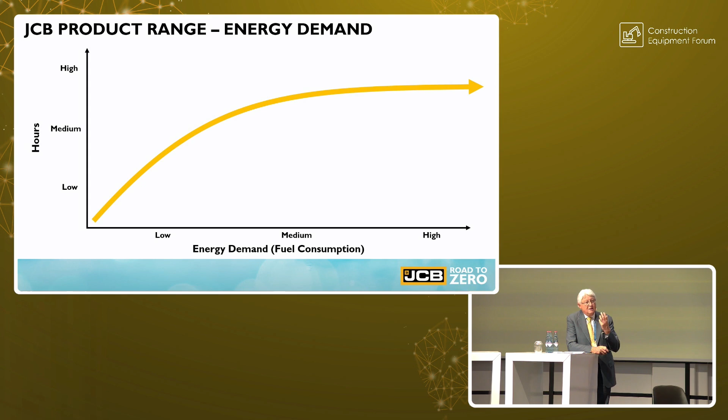And we like to make a parallel for our machines. If we take in a graph the hours that a machine is working and the energy demand of a specific model, we can make a comparison with road vehicles, say, for example, with cars, buses, trucks, or trains. And we can say that compact machines are very similar in terms of energy requirements to cars.

Why is that? Other types of machines, like medium-sized machines, have an energy requirement more similar to buses and trucks. This depends mainly on how many hours they work and what kind of application they are working in. And if you go into heavy construction machinery, their energy requirement is more similar to that of very high utilization, like trains and that kind of thing.

But to stay on the compact machines and the energy demand, we make a comparison saying that a mini excavator, normally speaking, is working 400 hours a year. And if you think of a car, normally speaking, a car is making, on average, 20,000 kilometers per year, with an average speed of 50 kilometers per hour. So, in reality, we are using most of our car for around 400 hours a year.

And so, we have established a perfect correlation between a mini excavator and a BMW. So, it's a great step. But this is giving you the perception of the fact that, how is it today, say, popular to have an electric car? At the same time, in terms of energy demand, the mini excavator is very similar.

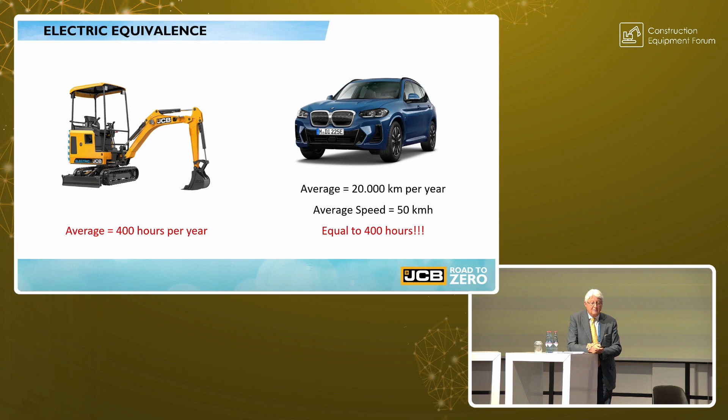So, we have developed a range of electric machines that is in the range of the compact space. Machines that are used for a number of hours, which is relatively low for a type of equipment. So machines that are used in an intermittent way for about 400 hours, maximum 500 hours a year. And we have quite a vast range of these machines.

But when you go back to our graph, we determine what we call a job site limit. So fundamentally, a limit for machines of a certain size, of a certain dimension, to be effectively used with an electric variant. Because there is also one question, which is the time taken to recharge this machine and the availability of enough, say, electric source or electricity source to make the recharging of the machine effective.

When we arrive at bigger machines, then this becomes more complicated because, first of all, the machines are probably working in a remote environment.

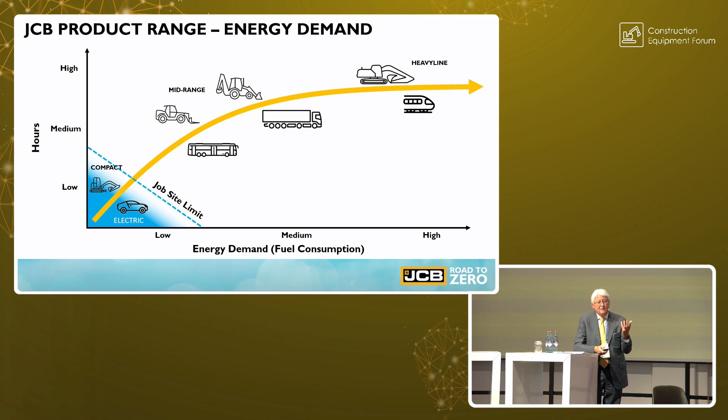The electricity, the power required to recharge this machine becomes too much, and is not available on site. We are convinced that to make decarbonization effective, we need a solution which is fast refueling. The recharging of the equipment has to be very similar to filling up a tank, and the energy source has to be mobile, because our machines don't go to the pump to get filled with diesel - it's the diesel that is taken to site to refill the machine. These are the two main objectives of our developments.

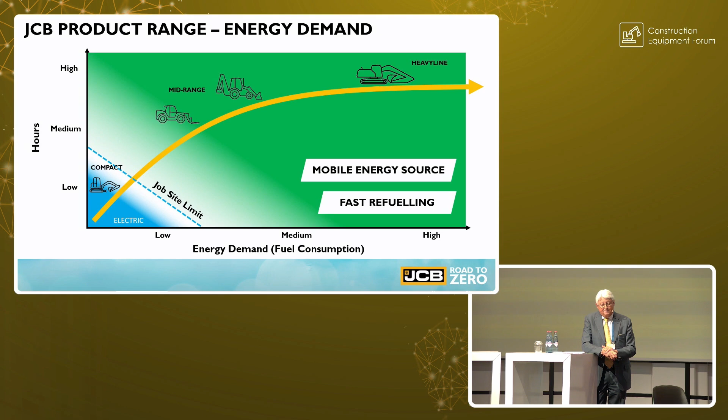There is also another consideration: in the 10 years between 2010 and 2020, we have increased the productivity and efficiency of our engines, obtaining an average fuel reduction of about 50%. So we have reduced the use of diesel by 50% in 10 years, and these are real data taken from our telematic system - this graph is real, it's not just a drawing.

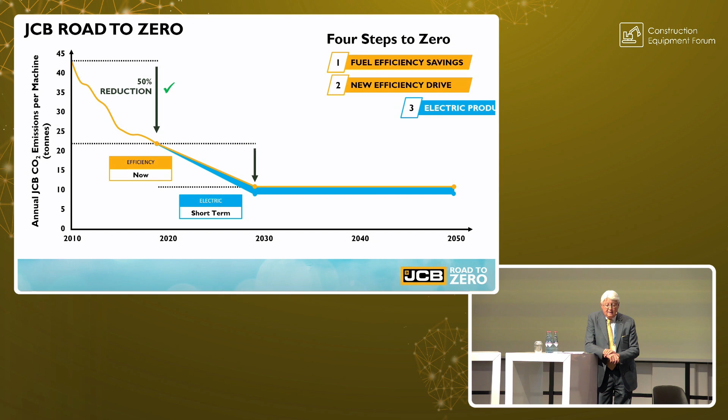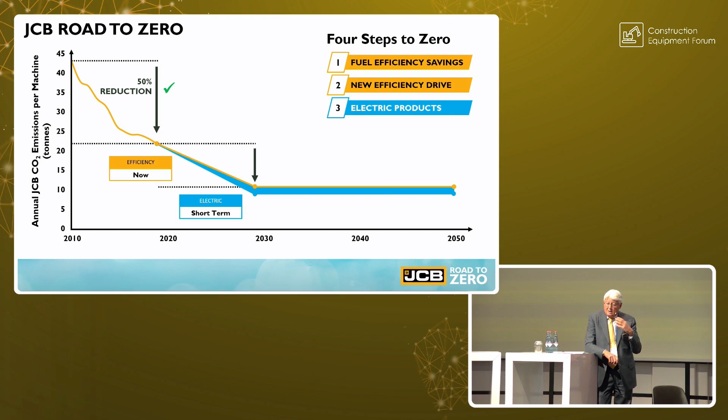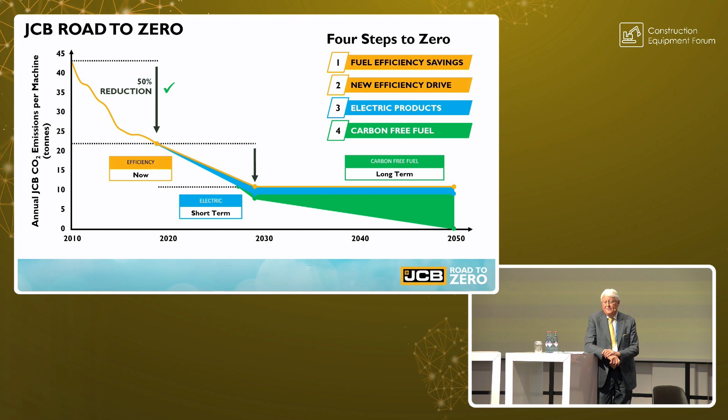To arrive at real decarbonization, yes, we can do more efficiency in the engine, and this is an area we are really active in. But we think that with electrification of machines, yes, we can electrify efficiently a number of machines, but the effect on decarbonization is relatively small because they are compact machines and the CO2 they emit is relatively small. The real step to arrive at net zero by 2050, which is the goal in Europe, we need something far more radical - the only way to achieve this is to find a carbon-free fuel, which is very limited in terms of what options are available.

I'd like now for you to see a video where our founder, our chairman, is telling you what we are really doing in this area.

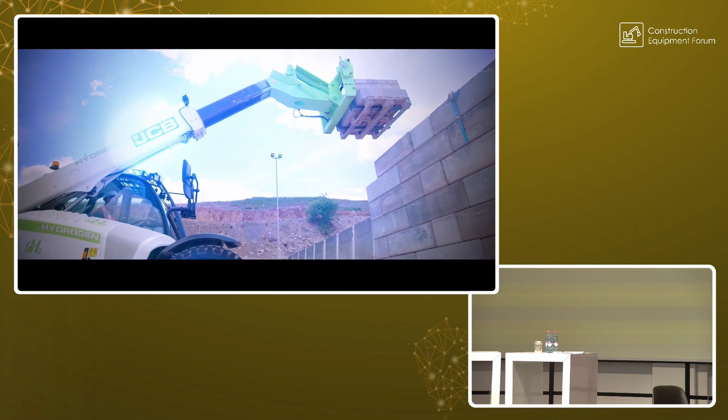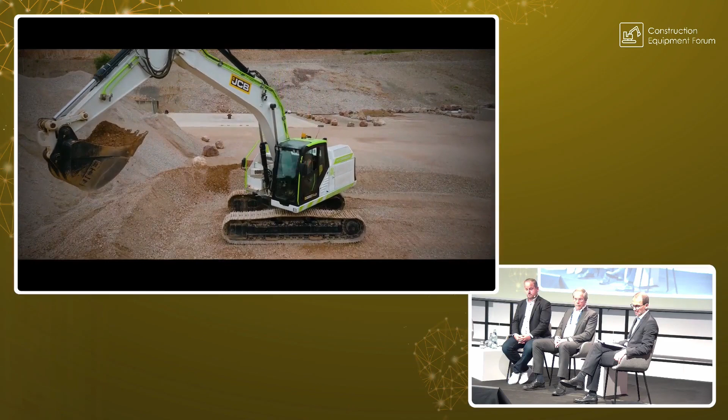I'm often asked, why hydrogen? Where does the power come from? It comes from that - that is a glass of water, H2O. You split the H2 from O, and it's possible to do it at scale around the world. This is power - the power to move the earth, the power to change the world. This is JCB's hydrogen combustion engine at work. Welcome to the future. Meeting the UK's ambitious goal of cutting net carbon emissions to zero by 2050 takes a lot of bold thinking, a lot of hard work, a lot of innovation - the kind of thing JCB has been delivering for over 75 years. Two years ago, almost to the day, I set the challenge that we should be making hydrogen engines for the construction industry and for agriculture. Two years later, we have hydrogen engines working in the kind of equipment that JCB makes - a solution that delivers power in the same way as conventional engines, but with none of the fossil fuels. So where did it all begin? In the early days of the hydrogen story, we believed the only technology available to us was a fuel cell, so we made a fuel cell prototype 20-ton excavator. We started to understand the complex challenge of putting a fuel cell into a piece of construction equipment. Construction equipment machines need energy quickly, whereas fuel cells were maybe better suited to a more gentle environment. We started to realize that maybe fuel cells weren't too good for response, were too complicated and too expensive for the market they serve. We knew we at JCB could do better. The two machines we have on site are game-changing. Firstly, we've got a backhoe loader. Secondly, we've got a Loadall. What we've done is taken our hydrogen combustion solution and incorporated it into both machines. We've worked out how to remove the fossil fuel tank, replace that with hydrogen tanks, and now we've got both machines running with the same characteristics of speed, of loading, of digging, performing in the worksite. So what's the secret? It's this.

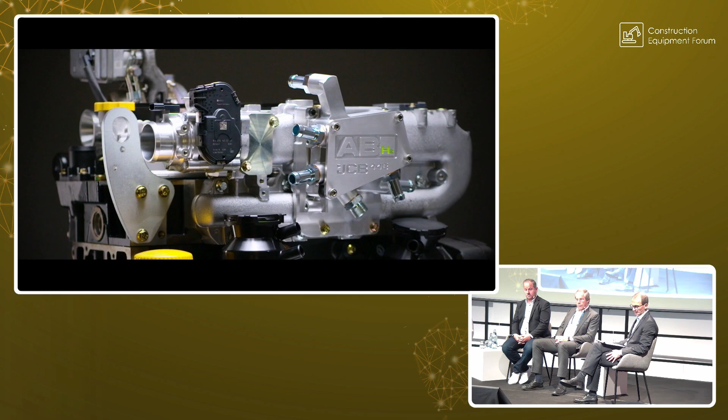This is not a conversion. This is brand new combustion technology. We've had to look at almost every facet of the engine, and we've completely re-engineered it to run on hydrogen. It's a zero carbon fuel, and it gives us a zero CO2 solution.

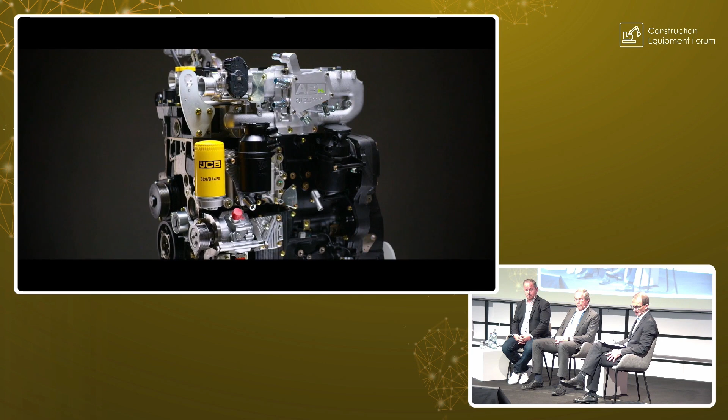We've kept the DNA of the engine. The components are familiar and common. The big difference is the fuel. We've gone to a zero CO2 hydrogen gas. We inject it into the engine. We've lowered the pressure, we've lowered the temperature, and that gives us a clean burn and a zero emission product.

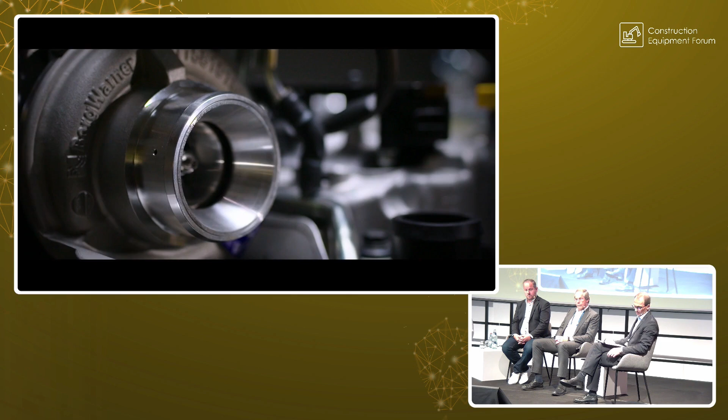We've worked really hard on the performance characteristics of this engine. We've done that to make sure that we deliver exactly the same power and exactly the same torque as the diesel power plant that we've replaced.

But it's on refueling that the hydrogen combustion engine really comes into its own. Most of our machines, 97% of them in fact, the fuel is delivered every day while the machine keeps working. So we've developed a fueling system, a hydrogen bowser, so we can take hydrogen from the tube trailer, decant it, and deliver that hydrogen fuel to the machines that are working on site.

JCB is the first in its industry with a hydrogen combustion engine solution. But what's needed now is a hydrogen fuel infrastructure, one capable of producing the quantities of hydrogen required to power the solution at scale and transporting it to where it's needed.

With investment, that infrastructure could then be adapted to produce the necessary quantities of hydrogen, preferably green hydrogen, enough to fuel our machinery and power other industries too. A practical solution to a global problem.

In a world where energy security is now a top priority, these are more than prototypes. These are fully fledged machines. Working right here, right now at JCB, we're proving daily that hydrogen does work, that it's a clean, renewable, transportable fuel, capable of storing and delivering the power our industry needs, quickly and efficiently, without the carbon.

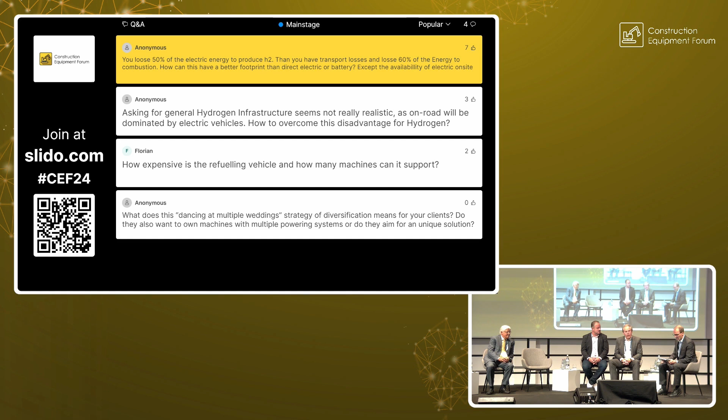Just an example for a 30-ton excavator. If we want to electrify that, which has the best efficiency, no question about it, electric power is very efficient. But we would require about 800 kilowatt hours battery capacity. A Tesla S model has 85 kilowatt hours, so we have to put almost 10 Teslas on the back of our excavator. That means around 6 to 7 tons of lithium-ion battery we have to install there.

But we get to a place where the infrastructure is not capable of recharging this machine. And there's not only one excavator, there are a lot of JCBs and other construction machines on the site. So everything has to be recharged if it's going electric. One solution is the H2 generator. There are examples in the market, also Hitachi Energy is working on that, providing up to 1,000 kilowatt hours and even more in a modular way on a job site. That's a solution recharged with a fuel cell and hydrogen, because that's a big difference between on-road and off-road, and maybe also on-rail and off-rail.

On-road and on-rail, you can stop the vehicle to recharge at a fuel station, or a station on the rails. Off-road, the fuel station has to come to the vehicle, to the job site. So somehow we have to transport the energy, and at the moment the most reasonable way, though not the best way, is to go into H2, because it's a nice energy carrier. It provides a lot of energy per volume.

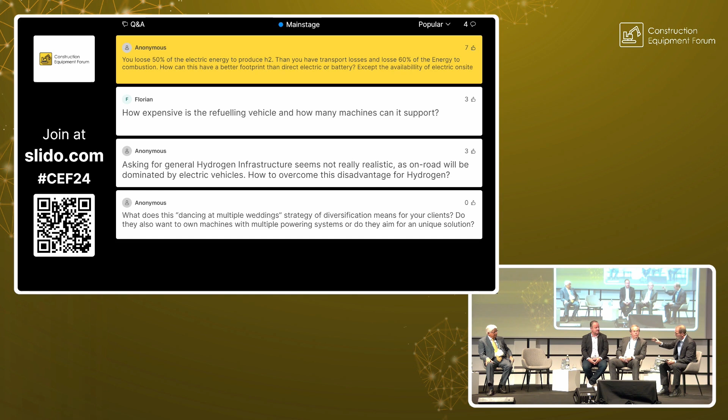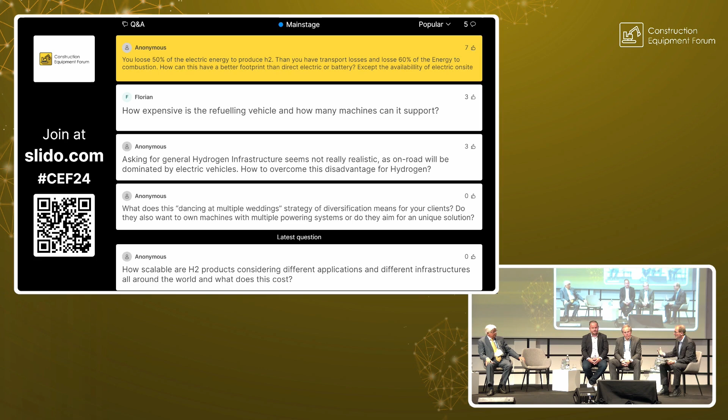A follow-up question - you alluded to this in your presentation, the H2 infrastructure. It was kind of a vision, and there's one specific question related to this. Asking for general hydrogen infrastructure seems, in a sense, not realistic. As on-road will be dominated by electric vehicles, how do we overcome this disadvantage of hydrogen in terms of infrastructure? Where does the hydrogen come from? You alluded to this gray and green hydrogen.

Fully agree to a point, in the sense that obviously nobody wants to build a very dense hydrogen infrastructure right now - it would make no sense at the moment. But there is a European approved project whereby there will be a network of hydrogen refilling stations, in what they call the TEN-T, along the road that fundamentally goes from North Europe down to south, over Italy, where there will be a refilling point for hydrogen every 200 kilometers.

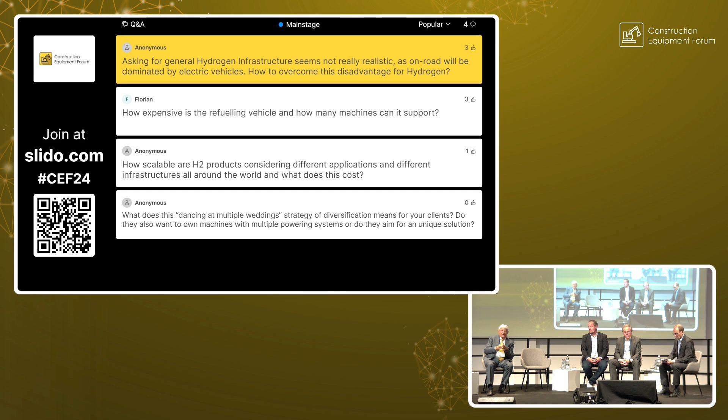This means it will be possible to have hydrogen trucks with hydrogen engines, doing this kind of hydrogen highway and carrying goods with no carbon emission through Germany, Austria, and so on. It's clear that to reach decarbonization there will be multiple solutions, and probably for cars running on motorways that stop at refueling stations, electricity will be a more convenient option. But for construction machinery, where you need to deliver the fuel on site, electricity doesn't really fit. I fully agree with Hitachi's estimation that for an excavator you need a minimum of 800 kilowatt to be efficient. The audience is, I think, concerned with how we get the hydrogen to the construction site.

Let me just take one more question, very related to this. How expensive is the refuelling vehicle? How many machines can it support? Is it expensive to refuel? How many machines can it support?

For now, yes - we're talking about roughly 15 euros per kilogram. Your machine is, what, 10, 50 kilos, 20 kilos? In terms of hydrogen it's about 20 to 25 kilos, 24, 25, and that gives you 8 hours of work. Consider that 1 kilogram of hydrogen is equivalent to 3 kilograms of diesel in terms of energy, so you have a 1 to 3 proportion.

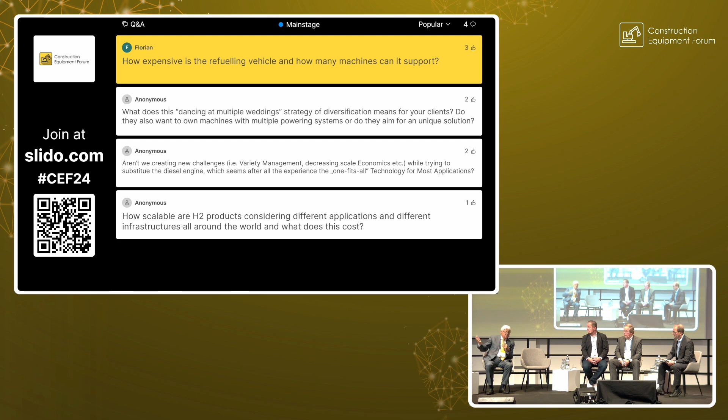The transport isn't simple, because the hydrogen needs to be compressed to have a significant volume to be transported. Normally the compression is up to 700-800 bar for long transport. The vehicle you saw in the video wasn't really specific, just a tank - actually a bowser that you can put on any truck, where the compression is 350. So it fills by different types of compression, and then when you refill the vehicle, the compression in the vehicle is a bit lower again - so the movement of hydrogen happens through different compression stages. Refilling one of our machines from empty to 25 kilos takes 5-6 minutes, so it's similar to diesel.

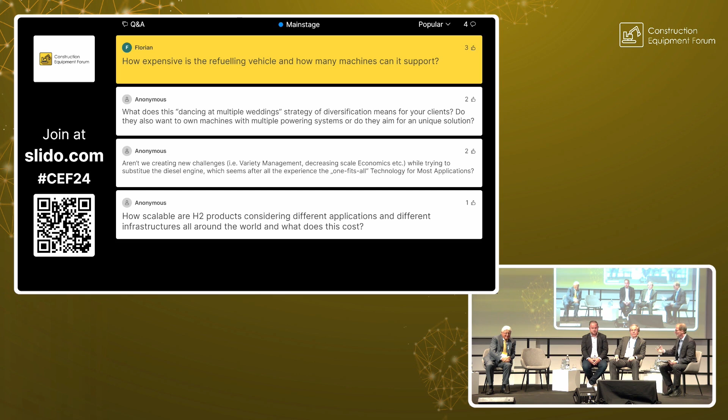Okay, we came to an end. Thank you very much - we will have different solutions again. Hydrogen is a solution going forward. It's still, let me call it, in the development phase - it's not scaled out yet. Infrastructure is a challenge, cost is currently still a challenge, and where does the green hydrogen come from is a question clients ask. But the manufacturers, together with the engine manufacturers, are working on it, and technologically it works - that's not the question.